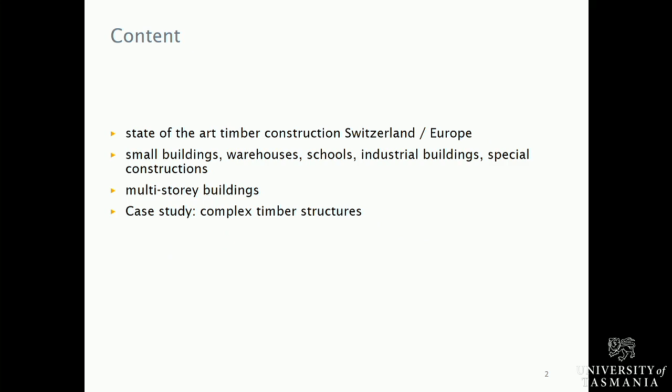Okay, let's get started. These are the topics I'm going to talk about to give you a little insight on what we're doing over in Switzerland, starting with small buildings, going through a couple of designs, and then discuss in the second part a case study on complex timber structures. For us in Switzerland or in Central Europe in general, timber engineering is a kid's play. It's easy for us. We do a lot in timber and we have a lot of expertise. So here, just to start with, a little example of a playground for kids built in timber.

Let's have a look at some small buildings, as these ones here. This is a building from Switzerland. The idea is to have an autark building, which just includes everything. And the idea is also that you can place these kind of buildings at any location you like, so you can move them around. You can move them by helicopter, for instance. And the idea is that everything is in there you need for living, like the resources. You need electricity, you need water, you have waste. So you try to get around with all these border conditions, and this gives very small, compact, but also from an architectonic point of view, very nice structures.

This is an example from an architect from Madrid. Same idea, as you can see, very lean construction, very simple kind of architecture. Everything is in there. You can see the two hooks which are used to transport the building to a different site. Of course, all the footings are temporary. You can have something like screwed footings or temporary small concrete blocks. That's all quite easy to do.

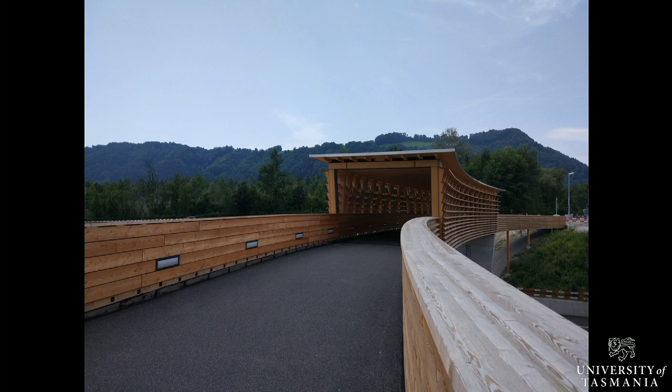Another example, we do quite a lot of bridges, be that for normal traffic, or especially for foot traffic, bicycle tracks and stuff like that. Here, a crossing over a 4-lane highway, very simple solution. Basically, what we have here are two walk-in trusses, nicely covered bridge, very good for protection against moisture, direct water. I think this is the way you have to build. Also, there are some barriers around here, which are nicely protected. So these layers, you can replace them if you need.

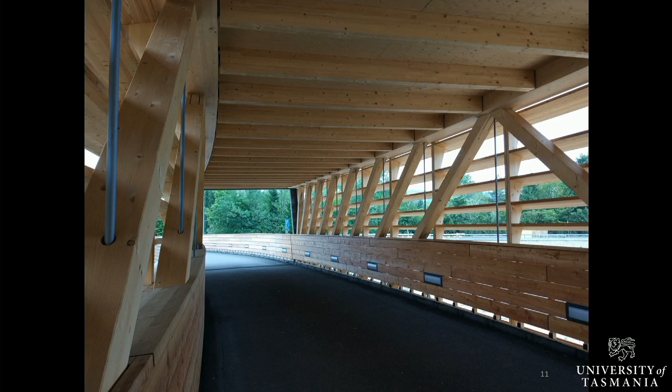Inside view of such a construction. You can see the trusses, very simple. It could be all in timber, but in that case, to make it a little bit more slender, they use here some steel rods for the hangers instead of using quite big cross sections in tension. So very simple structure. On top, you have this battery of glue laminated timber to support the roof. On the bottom, you would have the same system being attached to the bottom girder of that truss.

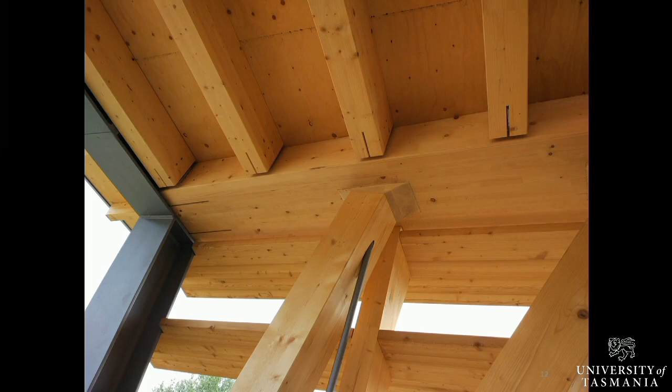So, pretty straightforward solution. I think one of the things which is very important in timber engineering are, of course, the connections. And you can see here some typical connections, which you would find in many structures. You have some connections where you go onto contact. The connection between the secondary beam and the top girder of the truss would be just a very simple bracket connection. This is a bracket which you won't find off the shelf, so it has been designed on purpose for that. And what we use then is some small diameter dowels in double shear to make these connections.

We also try to use the materials where they are appropriate. So, for instance, the portal on the front, to take all the horizontal reactions from the bracing on top and on bottom, is realized here in steel, because you get smaller cross sections. You have heaps and heaps of resistance out of these cross sections. So there's no point to use at these locations, for instance, a solution in timber. And it makes, of course, the appearance of the whole truss very slender.

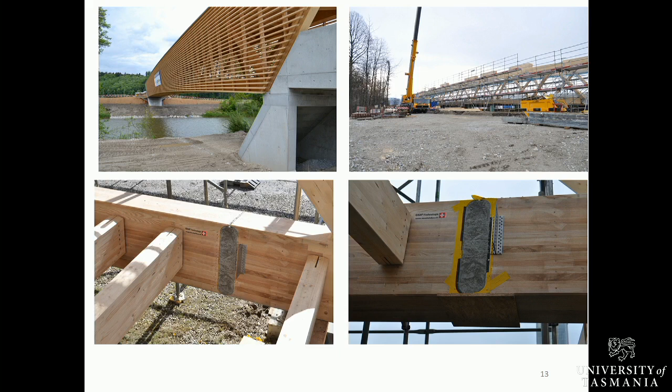This patch here is basically finishing the connection. You could imagine that in here we have some glued-in steel rods and steel plates, a steel connector, which allows to connect the two pieces together, and then you either grout or with a resin you protect the entire connection by this simple means. So I think these are quite efficient, very nice structures.

This is quite a new building that has been built on top of the Prealps in the center of Switzerland at an altitude of something like 2,300 meters above sea level. All the structure has been brought in by a cable car, which is actually servicing this top location. This building has been designed by Herzog & de Meuron. The architects amongst you certainly know these guys. They're looking at perfect solutions. Everything is designed through from A to Z.

If you look, for instance, at the line of these rafters here, if you stand in front of it, there's just a line. It's not plus or minus half a centimeter or a couple of centimeters. It's really precise and very neat. So the big challenge here was actually to prefabricate this structure in a way that it could be brought up by cable car and put on site.

Of course, on site there was a crane in the end, but the big challenge was basically all this planning, prefabrication, transport, and all the logistics you would need for building in such a place at such an altitude. On top of that, of course, winters are quite long, probably a bit longer than in Tasmania, where they go from November to October or something like that, with just one month of decent weather, but a similar case in Switzerland. So a pretty long winter and short construction period.

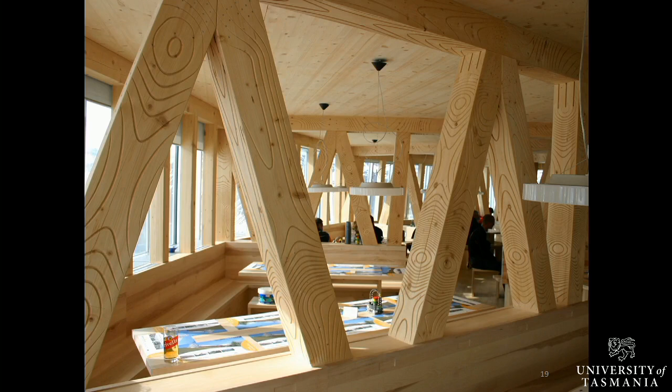And here again, of course, construction period even shorter. We are looking here at an altitude of something like 3,600 meters. So it's quite difficult to build in this kind of conditions. Inside views, it's a kind of a rotating structure. You can see some trusses which form separations, and also some new tools being used to decorate. So it's some CNC working of the timber structures just to make it more look like timber.

But basically this is also one of the concepts which are very important for all the structures I'm showing you. See they're all very neat, very clean, hidden connectors, and of course all the structures you will see are very precise, and this is one of the key issues we are looking at in Europe to get this level of precision realized also for timber structures. This then allows, of course, in a very short time to set the structure in place.

This is another good example, a little viewing tower, something like 35 meters high. This was a project we developed at our school. So it was a student semester project where the students collaborated between architects and engineers. So there was one architect, two engineers developing a project, and we did some pre-designs of this project. In the end, it was realized by the same student who had this idea as he was working in one of the bigger glulam factories in Switzerland.

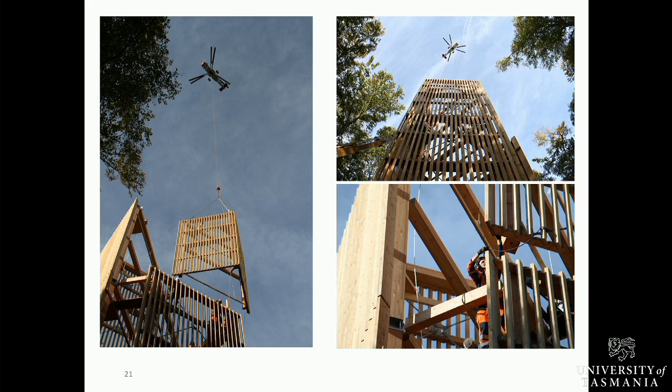So the whole operation to build the tower you have seen before took something like 8 hours of helicopter work, putting together the entire structure. The advantage, of course, of such things is that you don't need scaffolding. We need scaffoldings for towers. There are other examples that have been realized in Switzerland. Well, these scaffoldings, if you're looking at 35-meter high towers, they cost 60,000, 80,000 Swiss francs, and this would be quite a substantial amount. Of course, flying helicopters is also quite expensive. The minute is very, very expensive, but in that case, it turned out to be much faster and cheaper to do rather than going on site with cranes and trucks.

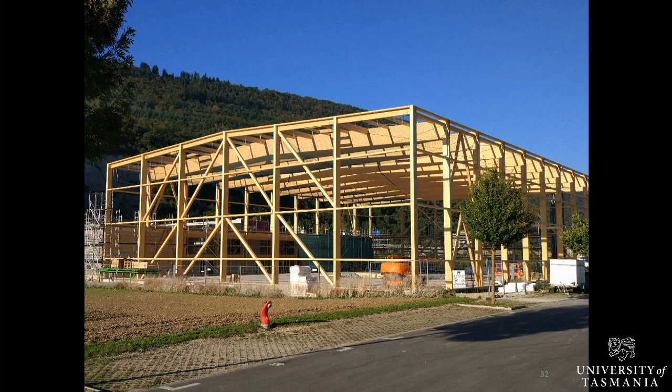Let's have a look and start looking at some industry buildings. I think some of the important things you need is you need some decent material to build with. And one of the decent materials, of course, is glulam, very important structural product we use very, very often. You have seen many projects already before, these nice square cross sections. You only get them if you use glulam.

If you use sawn timber, you will have the cracks due to seasoning. If you want to have nice and constant aspects of the timber, glulam is certainly one of the favorites to be selected by the people doing these constructions. Here, this is a building with a span of maybe 23, 24 meters. This was for the WTA Women's Tour in tennis.

This building is actually just sitting next to our school, which is part of the same school or University of Applied Sciences, so it's next to architecture, timber, and civil engineering. There's also a sports school which forms people like Roger Federer, and they are pretty successful, as you know.

So this fellow is here. It must be something like standard. So in length, we can produce lengths up to 32 meters, height up to 2 meters, tapered, curved, whatever you like. And I think this is a prerequisite to be able to realize structures in a cheap and efficient way. Mainly these guys here are a bit special.

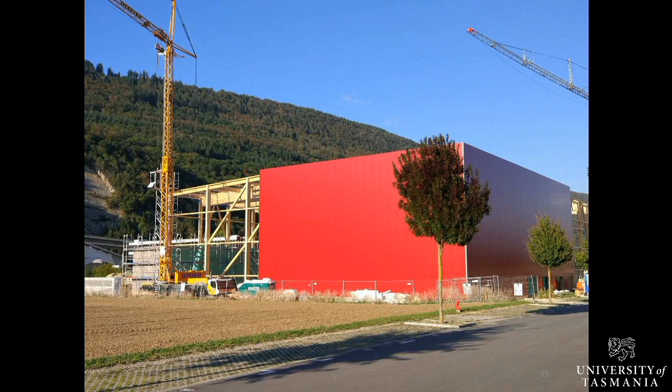It looks like any other boring building, red facade, in this case in steel, because it's just the cheapest and most efficient way to get it done. You could, of course, do it also in timber. It will be more elaborate. There will be more maintenance. These kinds of products, of course, are quite interesting to be used for simple solutions.

Let's have a look in a little bit more detail, not just showing heaps and heaps of pictures. This is a very new building, which is very special because it's a carpentry setup for a medium-sized carpenter who is prefabricating homes. The special thing is that this factory is going to sit in the middle of a residential area with very restricted access to bring in the materials and to bring out the prefabricated homes.

The second interesting thing is that these guys wanted to have one and the same building for producing these homes. On top of it, they planned the office of that company, and on the next level apartments to be rented out. And of course, this gives quite a lot of thinking to be done in terms of living and working in the same place. So you have to care about acoustics, vibrations, noise, and so on. And so this was the big challenge in these buildings.

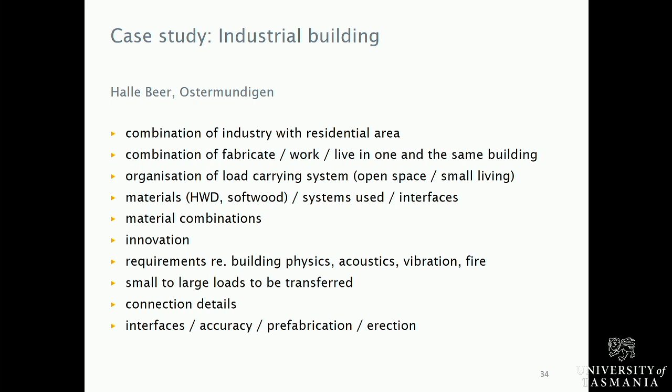So in this construction as well, some of our students participated in developing the layout of the factory, looking at truss systems for spans, again, of something like 24 meters, and in particular looking at hybrid structures, combining steel and this beech hardwood into high-strength columns, with the goal that they would have a similar size as a concrete column. If you look at these systems, you can take a lot of load on them.

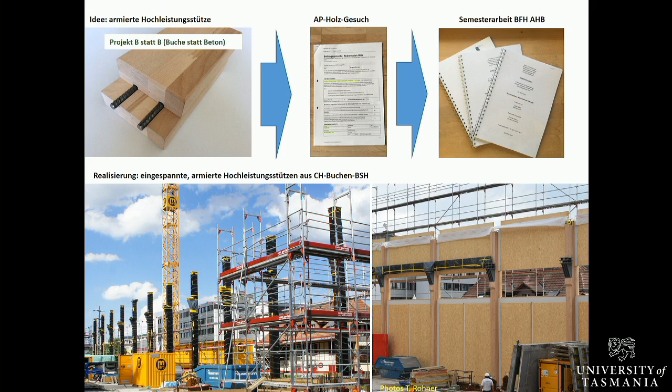So this asked for some tests and development and calculations and optimization, and the guy was interested to use that in his factory. So you can see here this column prefabricated, nicely covered. Beech is known to suck in water as much as possible, so you have to protect these fellows from the rain when you're building. So here again the columns.

And another thing which is very important and gets more and more important is to be precise. Usually the concrete guys are plus minus 3-5 centimeters, which is not precise enough. So we had to take all these tolerances by other means.

So for instance, looking at positioning this steel box here, which will then take the footing of the column, the column has to be vertical and at the precise position. It must be spot on, plus minus nothing, because afterwards you will put in prefabricated wall systems and you have to level out your building nicely.

So here, for instance, they also used this new technique called BIM, which is nearly a 4-letter word in Switzerland already, because everybody talks about BIM but nobody's doing it. Here they really tried to interact and have this data, so leveling out this piece was directly controlled by the programs via this measurement device here.

So you can see here a closer shot of these columns. Basically, the column finally will be a triple member with grooves to the side of the member so that you can place your rebar. This rebar will, of course, in the end be linked with adhesives to the timber to have a composite action, and at the bottom of the support to have a fixed moment connection.

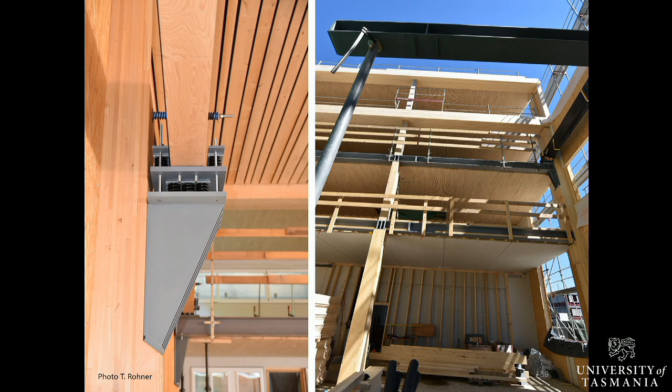So you can see here the columns again. Piling up the columns, it's important that you have end grain connections. In this case here, even replacing a direct contact between timber with an additional steel box where you can connect the secondary members here, also in steel, to facilitate the erection.

So these floor elements would slide into these I-beams, and you can have very easy solutions for the floor. You can nicely connect it also to these I-beams to have diaphragm action and stuff like that.

Well, I think this is the most important thing you can see here. Even the crane, the overhead crane they have in there, something like a 10-ton crane, is running on a timber beam. You will get a lot of vibrations and dynamic action on the building, which you don't want to feel when you're sleeping on the last floor.

So a lot of effort has been undertaken to actually disconnect this system from the rest of the building. A nice little detail introducing by contact these quite big forces coming from the overhead gantry.

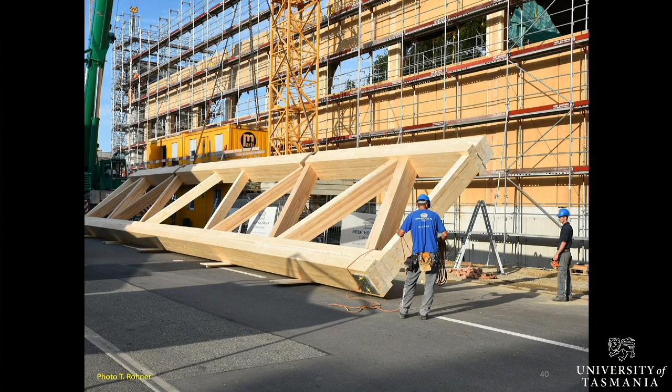This fellow here was also part of the development. You would like to have on the bottom, on the first floor, an open space for all your activities for building prefabricated homes. So you need this open space, and you need big spans.

And there have been some calculations, as there are a couple of stories on top with substantial weight. So they developed these big trusses, which are, again like in that timber bridge, walk-through trusses as part of the building. This element here has the height of the next story.

Here again, in some parts they used hardwoods for the highly loaded diagonals. You can see no connectors in there, but of course everything is connected, in this case with glued-in rods, which from an aesthetic point of view are very interesting. Well, we have some people who know how to do that.

You have to do that, of course, off-site in the factory where you have good conditions. All the support details in order to stack that element onto the timber columns or the beams are already in place. You lift it up, you position it, and this will be the final view from the interior.

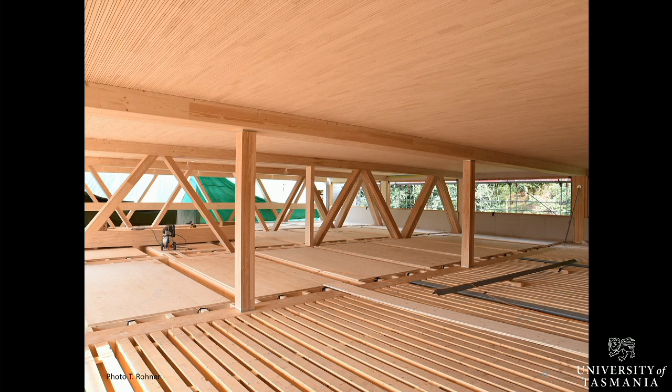There you have the trusses giving the height. You have the top chord of the truss and the bottom chord where you attach the secondary elements. Everything is prefabricated as widely as possible to have it easily installed. Not many things to do on site.

So basically, of course, there are some tools around, but not many. It's all done or prefabricated to a level that there is nothing left to be done on site actually.

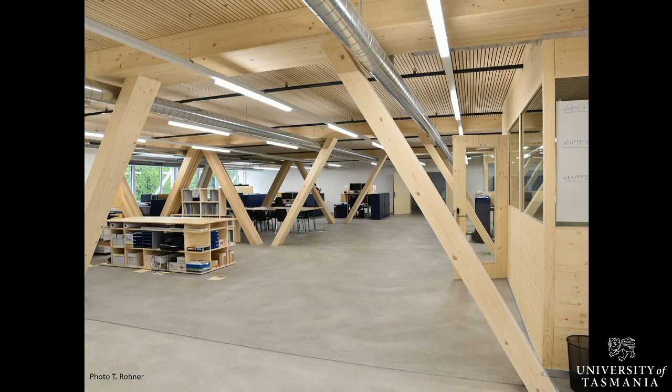And this would be the final view. You can see here these trusses. So these trusses are not full trusses. It would be preferable, of course, to have the truss linking at the node. So we get some bending moments here. So that's why probably also these fellows are quite big. But we need some space to go through.

So this is the office part of that building, where actually the structure matches quite well with the usage of that office space. Of course, it stands maybe a little bit in the way. It's not an open space, but in an office you don't need that necessarily.

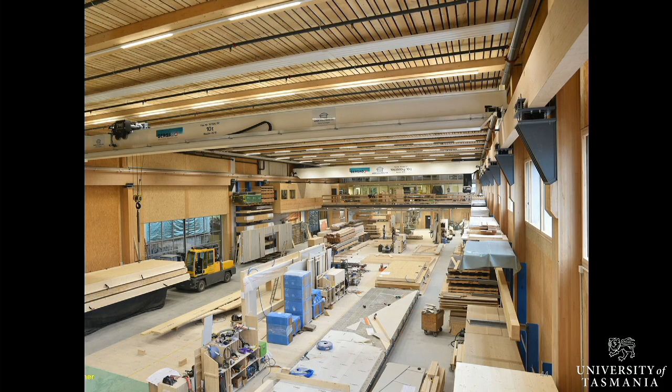However, on the bottom, this is then the look into the factory, which is operating now. We will have here again the bottom truss at the bottom chord of that truss, which is sitting above, ensuring this big span. And you can see the nice layout with all the materials, all the machinery which you need actually to prefabricate homes. So they will, of course, build finished elements which they then transport to the site for a new construction.

This is just another shot. You might also see that these workspaces usually are quite nice and clean. The messier places, you could maybe find in glulam production because they are working with adhesives and stuff like that. But in these places here, you want to have precise solutions. You have a neat way to work with the materials.

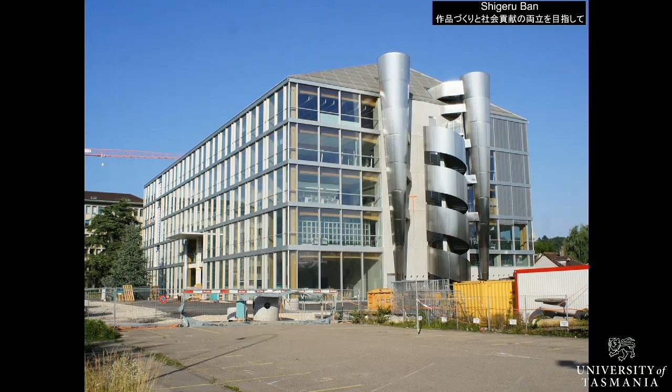Okay, multi-story building is something which is very current. People are trying to do them here as well. So in Switzerland, this is also a big issue. Everyone is trying to break the record of the highest building, most possible stories. But I think the big market is in something like 4, 5, 6-story buildings. And at least in Switzerland, we are not allowed to build that much into the height. It is changing now, but in Biel, for instance, where our school is sitting, we are limited at something like 5 to 6 stories.

This is a Shigeru Ban design, which is part of a big development by the Swatch Group. You know all Swatch watches, and Hayek, who is the owner of the Swatch Group, wanted to have a timber building. And here again, we are looking at the building where they assemble watches. And that means that in these workspaces you must have zero vibration.

And this is a very big challenge because every construction material is kind of softish. You have your floor systems, so even badly executed concrete floors or steel floors, they could be too soft. And that was a very big challenge here to be solved, because in these areas you have just office or workplace after workplace where they assemble the watches.

Unfortunately, they put down the blinds, so you cannot see the timber structure mainly, but it's a very simple post and beam timber structure at the inside with a kind of a curtain facade in glass all around.

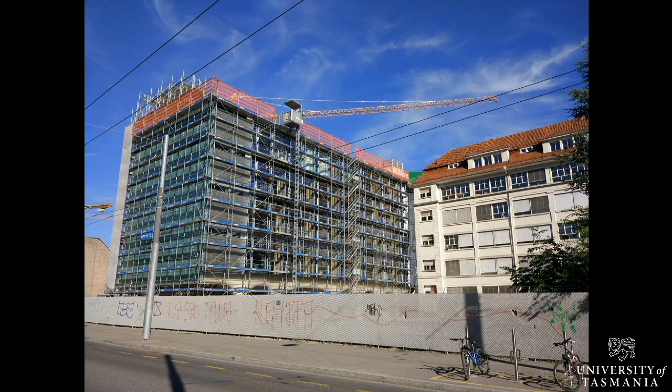This is the head office of the Swatch Group going on. Again, a 5, 6-story building. It's all in timber. And you will see afterwards the structure which goes above, on top of that, will be a very interesting free shape structure, also developed by Shigeru Ban. And this structure is going to be completed in the very near future. You will see some slides afterwards.

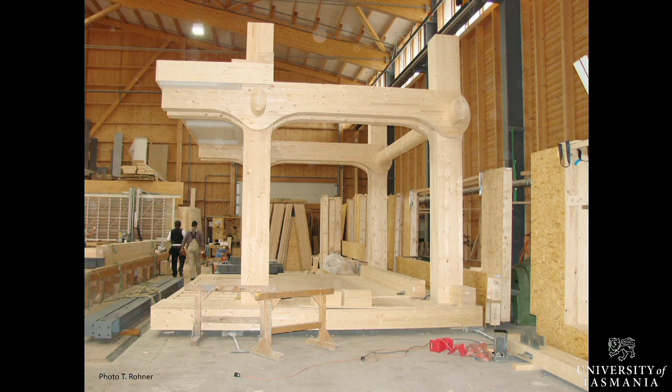Well, apparently Shigeru Ban is very well known in Switzerland, and people like to work with him. This is another Shigeru Ban building. It's just by chance. This is the Tamedia building. So a company that does prints, for newspapers, journals and stuff like that. And Shigeru Ban actually developed a system for that building which works with solutions that are only made in timber. So there are no steel connectors in here.

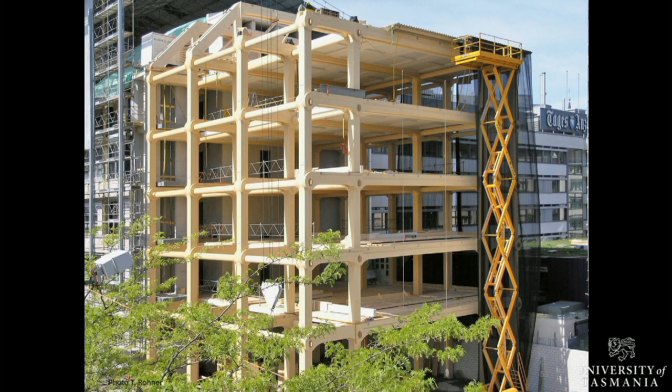Looking at a hinged connection, for instance, you could have this hinge in steel and a lot of steel plates all around, and the solution they were looking at here was to have a timber connection with this kind of oval or elliptical connector. So that's not a hinge anymore. It gives you some moment restraint. That means that you have frames which are built, which is very good for static purposes. Very simple erection, and that would be the building as it is realized in the end. It's like with bones.

Basically, the main part, in order to take all the bending moments or whatever, can be quite slim, but where you have the connection, there is some effort to be taken. You might need larger cross sections, especially when you're looking at pure timber to timber connections.

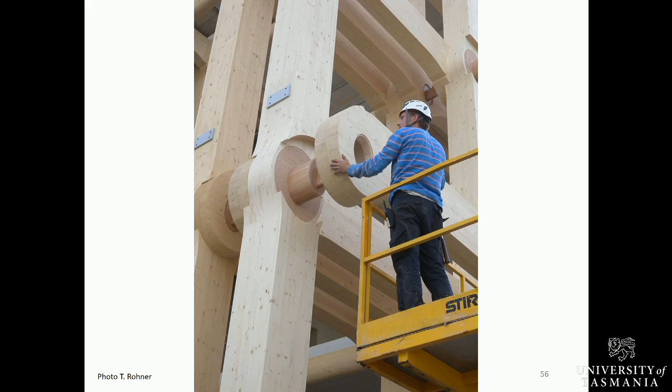Very interesting stuff. Here again, everything is prefabricated, 100% precise, and it can be erected by a crane and cherry picker, not much to do. You just see a little view of that connection, because there's so much force going through that you cannot work anymore with our spruce solutions.

So here is a multiplex plywood with plies turned 30 degrees, one next to the other, which gives a very uniform, homogeneous block of timber that can take the high lateral pressure you get when connecting the forces to that member. So locally you can see the timber has been reinforced at this location.

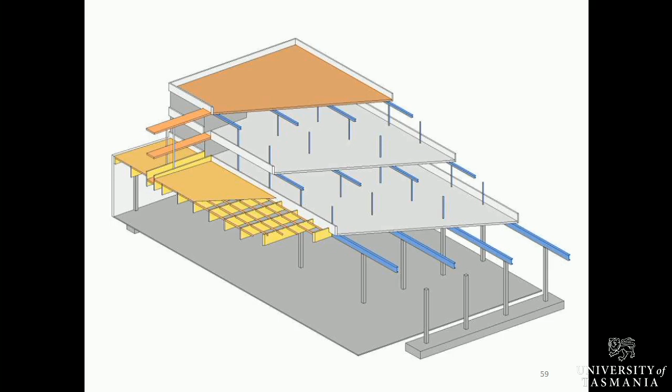This is another trend we have in Europe, looking into hybrid structures. Not everything has to be in timber. For some projects, it could be interesting to place the material at the perfect location. So here they used steel columns, and at places with bigger spans, precast concrete columns. Steel I-beams connect to concrete for composite action between steel and concrete, and in the other direction, timber, which gives you composite concrete-timber floors.

So this would be a shot through the section of the floor. We have these I-beams with the stud connection in order to have the concrete-steel connection at this location. Then they used prefabricated, vertically laminated floor panels with a little offset in the board. They actually worked with two boards of different depth, partly for the looks when you look underneath, but also for acoustics.

This gives a very good surface in terms of acoustics. You don't need any further insulation or panels, as you can see here. Here you see the grooves and the rebar, which make the composite action between these vertically laminated panels and the concrete. Very easy system, very simple, but of course quite special.

It's a new development to have systems that span in two directions. So far you would mainly span in one direction because getting away with negative moments on the supports isn't easy. You have to make sure the compression goes through here, but by casting it into the concrete at this place, it works.

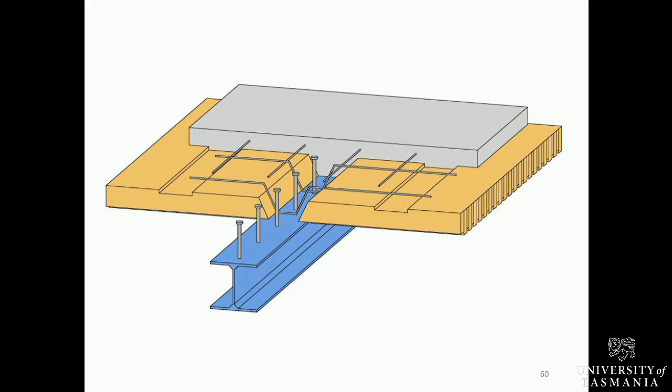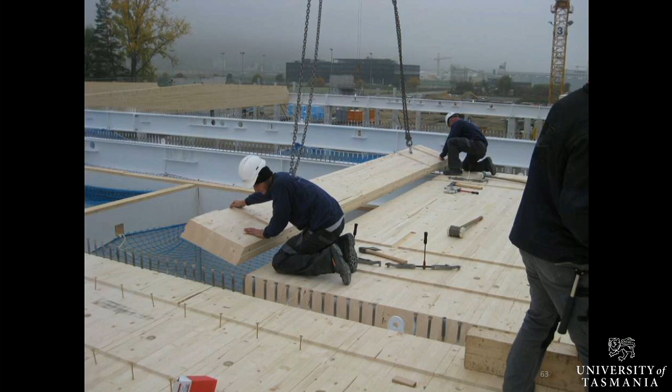Just some shots of how this is realized with the bolts connecting to the steel. Very simple installation of prefabricated, roughly 1 meter wide panels - that's easy to do. You can see the grooves here again for the composite action, with some screws in there just to make sure there's no uplift between the concrete layer and the timber layer.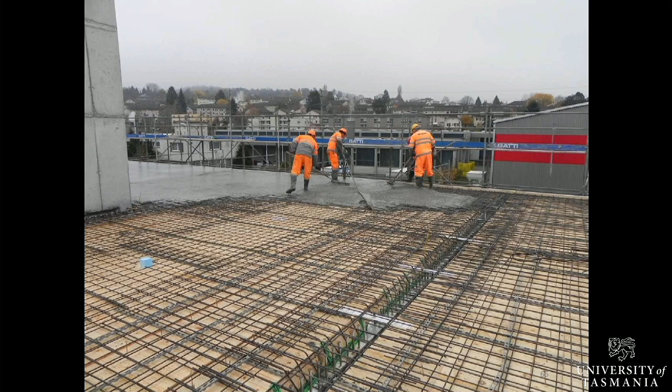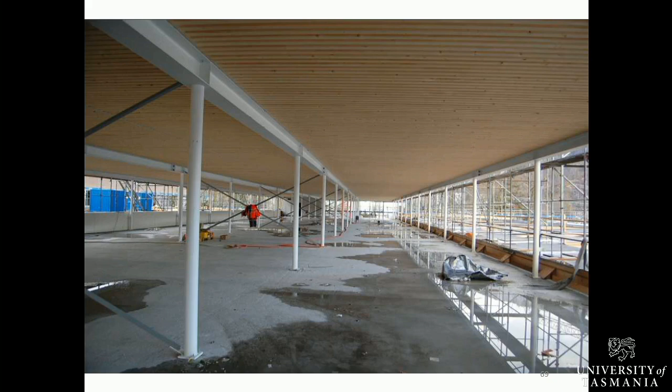Then comes the rebar, you pour the concrete, and you have a very interesting high strength and high stiffness composite floor. The spans are quite big in this case. Then you go for the next story. And from underneath, this is how the offices look like in the end - here a shot from underneath.

You can see this plus-minus profile, as we call it, which is very good for the looks and very good for the acoustics. It's quite interesting also: if you have this vertically laminated timber, you might have some concrete grout running through, but if you water, for instance, the top surface, it will swell a little bit and close up the gaps. You don't need any plastic sheet, you can directly pour the concrete on it, and you don't have any concrete liquid dribbling through your system. If there is, you have to clean it. We don't want to have dirty members in there.

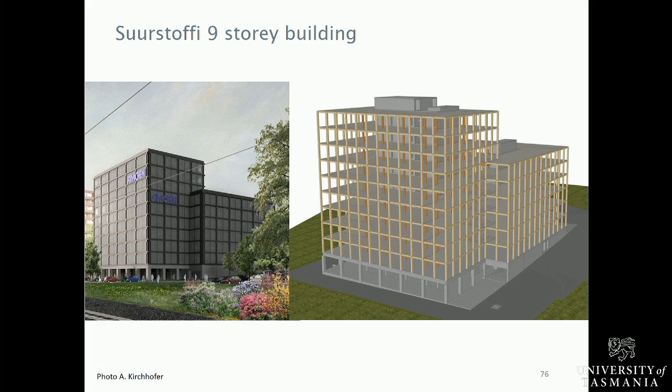And so on. I think we don't have to discuss that too much, but in Switzerland now they're also looking at 8 to 9 story buildings. We have quite easy laws in terms of fire safety, going up to the high rise, which is around 24 meters, which allows you to build 6 to 8 stories without any big troubles. Of course, there's always a concept you have to establish in terms of escape routes, non-combustible materials, and some places you might need a sprinkler. These things the architects or the engineers discuss with the fire authority.

And then it's the same again. Here you can see this is working quite well. High strength columns for the vertical load transmission, and for horizontal load transmission, composite timber-concrete floors. We have in Europe a new material that has appeared lately, which is beech LVL, a hardwood LVL with extremely good strength properties. They make big panels, but from these panels you can cut beams and columns in the size and width you would like. Sometimes you might have to patch them up sidewise in order to have your final section.

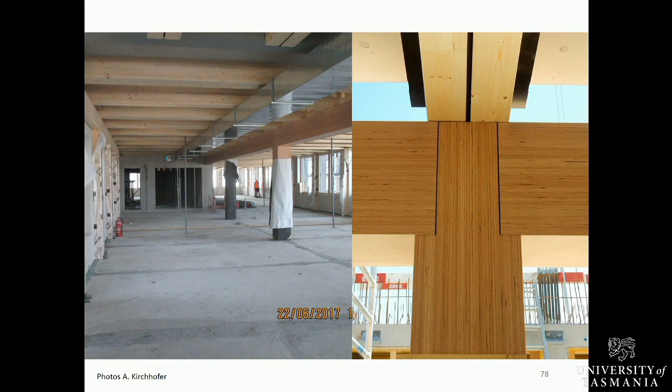Okay, that was my first part. Do you have questions on this before, after the break, we go on with some complex timber structures? Yes? Base plates. Do you say that the base plates on the foundation are welded? Yes, usually. Earlier you would say don't weld on site because you never know what you get. But now for some of these connections, it is much easier to weld. With mechanical connectors, you need double plates and splices and whatever gear to make it fit. But this way, it was just easy putting down the column. Exactly. It must be level, because you can maybe patch up a little bit, but not much. Maybe 2 millimeters if the column is not 100% perpendicular.

But there's always the big discussion: do you also want to have recesses in the concrete? For instance, you have a concrete core and you have to attach the secondary system one way or the other. You can provide openings to fit in, or you can provide already cast-in steel members with very complicated connection details, which is then again not very handy for the concrete formwork, right? Because it's in your way. So people start having flush surfaces with all the insets required already in there, and then come level and do some minor welding on site. But of course, you have to be careful and do a good job.

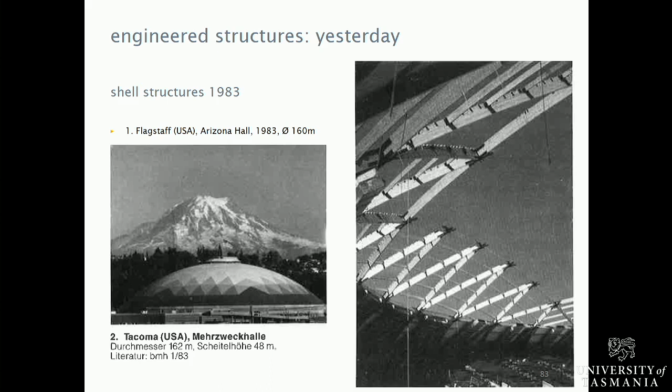Okay, let's go on. Complex timber structures. The things that I've shown you before is kind of boring stuff. Everyone does it, and of course it needs a lot of know-how and technology and so on. But I'd like to present you some very new fields where a lot of research is being done now. This is what we had already a long time ago. So if you look at the date, 1983, they already built domes with 160 meters diameter in free cantilever method. That could be done.

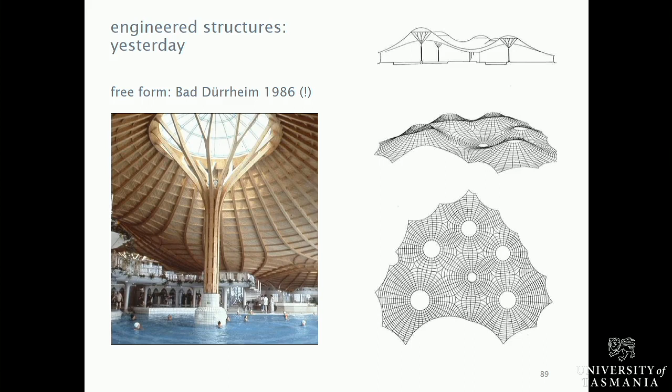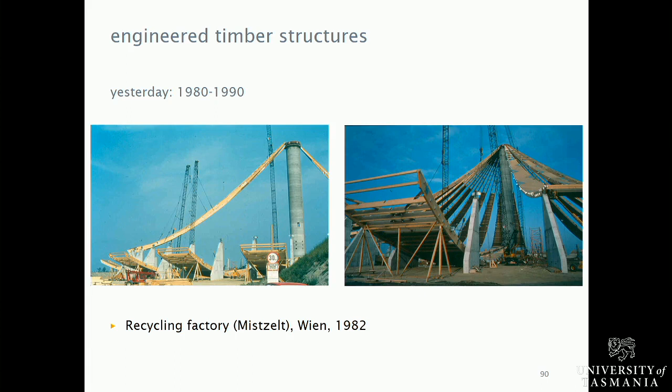The interesting thing is that these structures were actually built with the first issues of design programs. Before that, everything was done by hand, and at that time ETH Zurich, for instance, started developing computer tools which would allow to do static calculation. And I did my thesis at ETH, looking at whether it was possible to design dome structures by hand or not. And the conclusion was it's all fine as long as you have vertical loads, but as soon as you have non-symmetric loading, you're just stuffed with hand calculation. So we need these tools, and it was quite amazing actually that they could do this at that time already.

And the key basically for doing that is that there's a very high constructive competence within the carpenters. We train them for 4 years, and it's a good training. The know-how of the engineer, of course, is very important, and everything was done just using very simple models in order to get this geometry and these shell structures. And actually, I remember that for this hanging structure, they checked the deformation, and the deformation was within 20-30% of what they actually expected. It was even a bit stiffer than they thought.

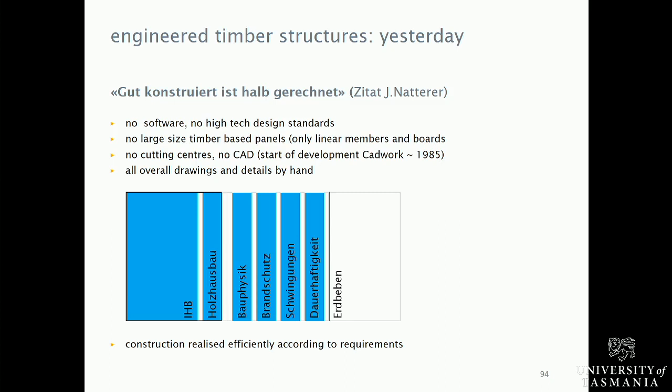Very interesting. And so people would only focus on some items. For instance, in that case, they would focus on how the engineered timber structure can be built. That was the main focus. And maybe there were some requirements in terms of something like fire safety; building physics, not important; vibration, not important. People wouldn't look at that, okay? Just take the most important issues and try to find a solution. That was the approach then. And so basically what they used were either short, simple elements or complex connections in order to play around with the geometry, but everything was basically quite simple.

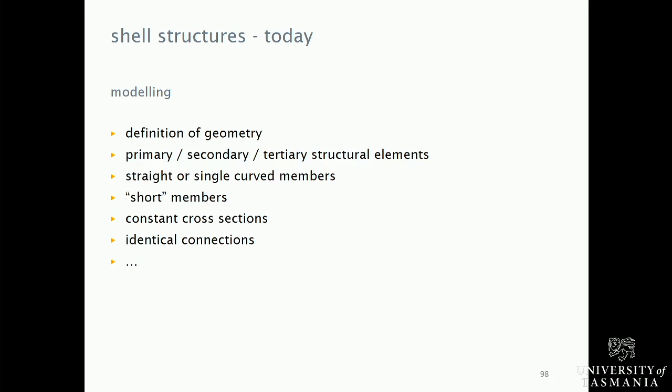And still today, this is what we do. What we have, of course, in Europe, we have state-of-the-art design tools. We have standards. We have Swiss standards, which are very similar to the Australian standard, which is also similar to Eurocode. And in these standards, we have a lot of information, a lot of help to do a correct design. And what we have today is a very big range of solid timber, glulam, engineered wood products in terms of panels, which can have big width and extremely big length. So it's getting much easier to actually build structures, or also complex structures.

There are also a lot of people developing systems like Lignatur. They would have panel members, but which are built up by single boxes. So with all the solutions: how you can connect them sidewise, lengthwise, how you do the detailing and everything.

So there's a lot of knowledge around. And of course, the big companies, they also have CAD/CAM. They can digitalize their structures. So we're getting in an entirely new kind of world.

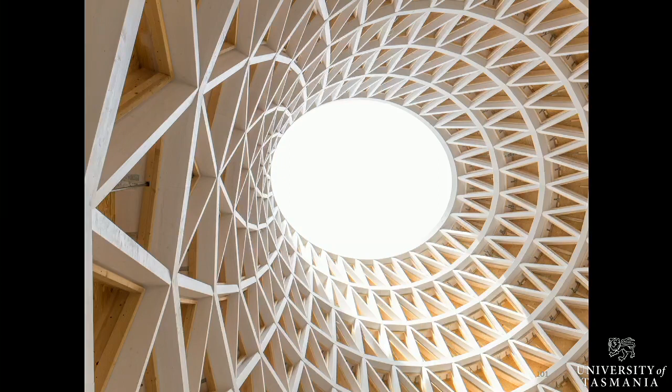So this is, I remember, a church building. This is very simple, basically, because if you look close, all the members are straight, or maybe they are slightly curved in only one direction. And the key here is that you have a solution for the detail that works so that you can build that structure, but it's not very, very complex.

It's still a demanding task if you want to model this and to check and to get all the internal forces and so on. But it can be realized even by companies which are fairly small. Sticks and putting the sticks together.

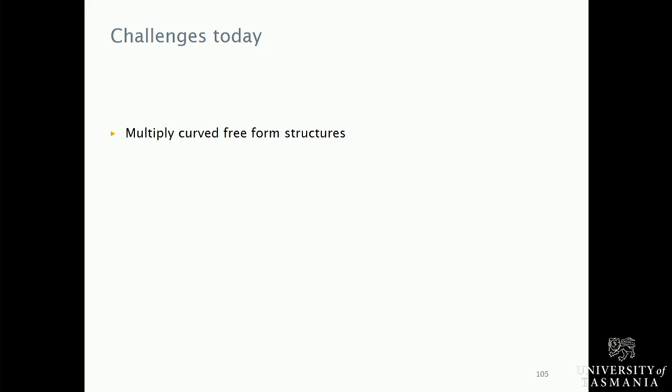Now the challenge we're looking at is multiply curved, free-shaped structures. You might have seen one or the other. Again, Shigeru Ban, sorry, maybe you should come up with good Australian architecture, and then we'll have some Aussie designers behind. A straw hat, which gives this kind of shape to the Centre Pompidou in Metz. So this is a real free shape structure,

actually covered with textiles. So even covering with textiles is not that easy. You need a pattern, like for clothes for a lady, for instance. You cannot have curves covered with square panels. That doesn't exist. So already this is a huge challenge.

In terms of timber construction, this is not too difficult to do once you have the geometry, because all that structure is built up by layers. So we have basically always two members running in one direction. So we have three directions, and in this case the roof is built by piling up horizontal lying members. The trick is basically to get the connection, and the connection was very complex

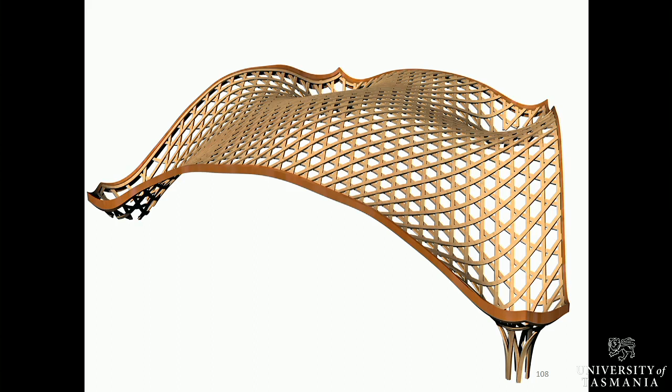because you have to start from the bottom. You sit on a scaffolding, you put the first layer, and you have a connection sticking out. You put the second layer, then you have to extend the connection, put the next layer, and so on, to be able to erect such a thing.

And if you're looking at the single members, of course, we have fellows like that, which not many people can do. There's one company, Hess in Germany. They started doing this kind of double bent members working with small squares, because a board which is, say, 35 mil thick, 120 mil wide, you can bend it only flatwise. You cannot bend it sidewise.

And in order to get the bending on the other side, you also have to work with 35 mil, okay? I have no idea how they put the things together, because you have to put pressure on both sides. You have to put the adhesive on and everything. So this is the secret of the company.

What people do usually for that is to have a kind of a pre-shape where they first produce a beam that is bent in one direction, then they cut it up in the other one and reglue it and put the curvature in the second direction. And if the geometry doesn't fit 100%, they start milling it down to the final dimension. So this is the way they do it.

Again, sorry, Shigeru Ban. This is that building. We have seen that building on the back. This is a 5-story timber building, the headquarters of Swatch. And there is this reptile or this snake biting into that building, which is a 100% free-form structure.

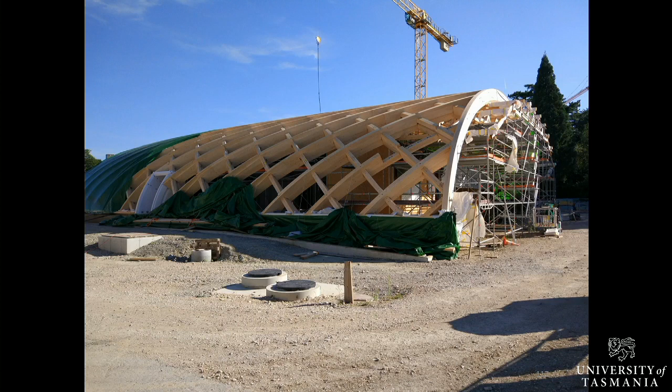Looking a bit closer, in the end, it's all very secret. Nobody has seen that structure from the inside or was allowed on site. They make a big secret out of that. But this is the kind of members we have.

If you look at these beams, they're all composed vertically of 2 sections because we have in this situation lap joints. That means you cut out on the bottom member half of the timber, and on the top member the other half of the timber, so that they can insert and get the connection. So for instance here you see there's one piece missing which comes on top.

So you put first this one here and then the other one comes on top, and you have to make sure that you can slide it into these gaps there, and also you need some connectors in order to take the shear forces. And I don't remember how many members. I think there were something like 2,800 members. Not one member is equal to the other one.

They're all different, and every member has to be designed specially. This is a huge task, of course, and I know that the guys who produced this structure, which is Blumer Lehmann, they managed to do something like 80 pieces per week. That's all. And every piece, before you manufacture it, you have to check if the geometry, curvature, everything is right. Very big task, because on site, if it doesn't fit, it doesn't fit, and you have to go back to

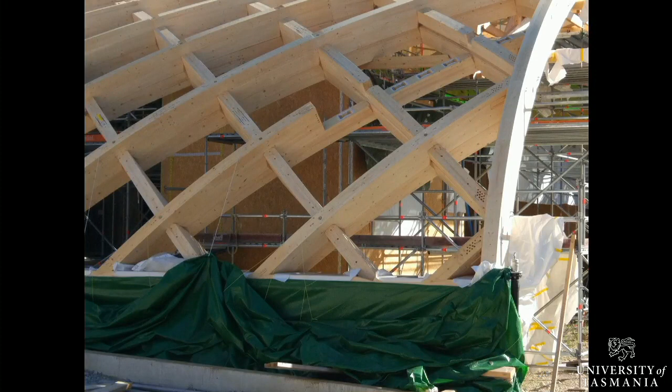the workshop. The only thing they did sometimes was some sanding, because it would not nicely fit in. So putting away a 1/10 of a millimeter or something on the surface, and then you can slide it in and do the connections. So it's very, very complex work. So closer look here, and you can see how these members intersect. You have to think about what part of the member is continuous, where do we have the cuttings.

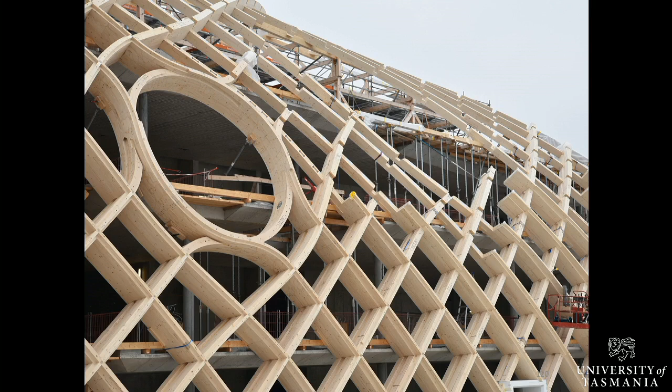What they try to do is basically to have not more than maximum 3 points to connect one piece on top of the other, because then the degrees of freedom are reducing very, very much, and you might not be able to erect it. And this is the kind of structure they built. So you can see this member here, for instance, there's a joint here, and this member goes over to somewhere here. So this is one part of the structure, and everything has to be produced prefabricated.

There was a question before at what moisture content these things are produced. They're produced at 12% plus minus 2.5, difference of 5% maximum. Everything is produced today in the shop. It's delivered at the end of the week. Let's say these 85 pieces, they are delivered, and they're straight away put into the structure.

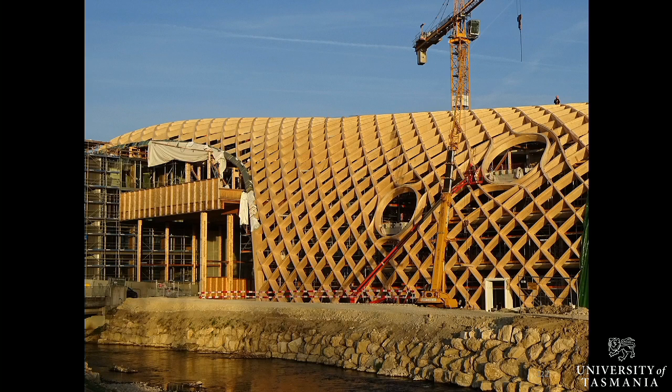And as you have seen before, the structure is always covered. So you avoid having moisture content. If moisture starts getting into that, you can forget about assembling that stuff. It must be really, really dry, otherwise it doesn't work. And then this is the structure, how it looks like in the end. Unfortunately, they don't put a nice translucent cover on that. The idea is that it looks like a crocodile or a snake formed by scales.

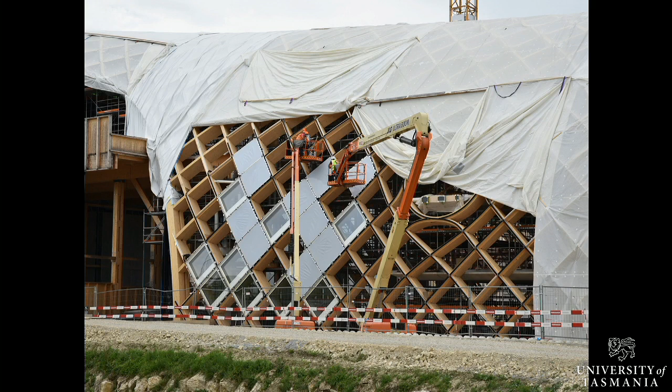The information from the guy who was looking after the production was also that every surface of a scale is about 2.5 by 2.5 meters. So they try to optimize the size of these openings. And the various covers, some is textile, some is solid, some is window, which gives then the final aspect of that structure, which will be opened pretty soon.

Now this structure here looks high-tech, extremely high-tech, not necessarily super high-quality timber, but a big problem is that you're cutting the fibers, and you have to do some precise design, and you might need some really good quality timber, and very, very complex. And the problem is, you will see in the end, that in most cases you don't get this shape in direct gluing, so you have to do a lot of milling. So what you do is basically you produce a big block and you start milling, and you have a lot

of waste. So there were some guys at ETH Zurich, Gramazio Kohler, architects, who were looking at digital fabrication, which actually took a completely different approach. They only work with boards. So you can see here a truss. This truss has a certain geometry, but the geometry changes from one layer to the other. So maybe this diagonal at the next level is just twisted around a little bit, not having exactly the same

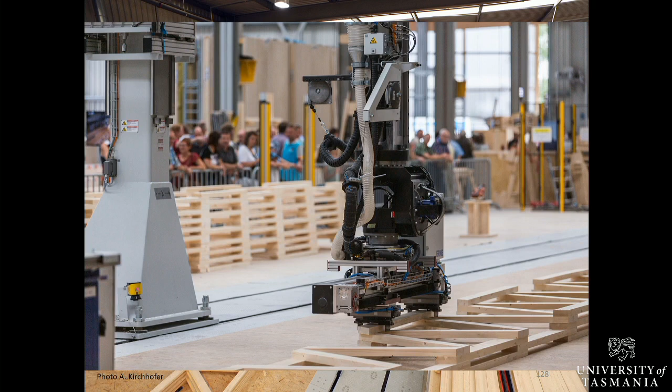The only guy you will see in that fabrication yard is the guy sitting here at the control center with a tie and suit. Nobody's putting one single hand on that entire structure. So here you can see that robot, and as you can see, the difference to the first structure is the first structure is defined by the connection, which is actually given by all the pieces which interconnect. So the connection point is defined by the cutouts, okay?

But here, we are going to put that a bit more to the left, a bit more to the right. It's skewed, so the robot is the only one who knows exactly where to put it. He also does the check if it's the right position, if the thickness is correct, and then it nails these connections automatically.

You can imagine also the routine to determine the nailing pattern, starting from that point and knowing that every nail is going through probably 2 or 3 sections, and you don't want to hit the nail on the section below. You have to consider that there are some spacings between the connectors, parallel to the grain, perpendicular to the grain. You have to fit it all in, or you can work with a minimum surface required per nail. So to write this kind of routine so that it works everywhere is probably a huge work already.

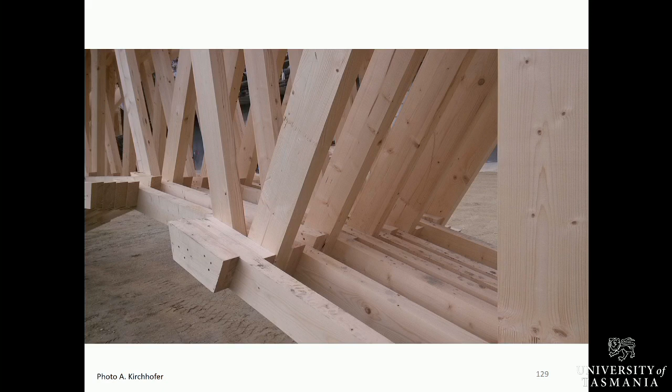And the interesting thing is, you see, this is just normal timber. So this is longitudinally finger jointed, solid timber in various sections, not a particularly good quality. But in the end, you have a huge family. You have a system with a system effect. If one of the fellows here is a little bit weak, it doesn't matter, the fellow next door probably takes the forces. This is then the concept of this type of structure.

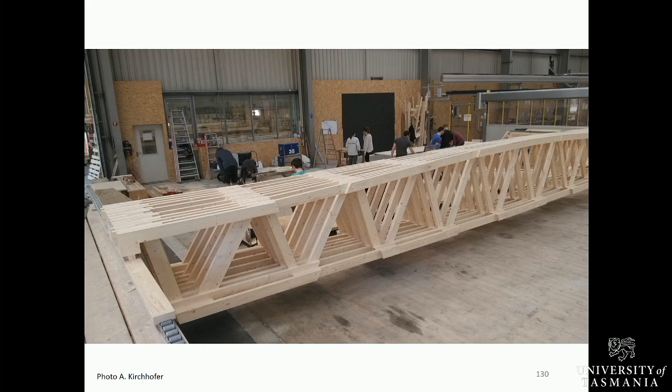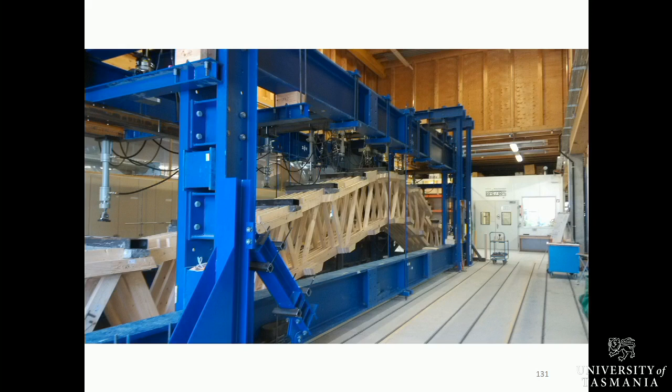So this is one prefabricated element. You can see that you get the curve in that way. You get also a movement in this way. So they produced heaps and heaps of these elements. We did some testing at our school to find out if the requirements in terms of strength and stiffness were met. The critical points here are actually the connections. So that was a special focus. So we would test 5 or 7 typical trusses, so different spans and different heights. That's what we were testing, just to make sure that it works.

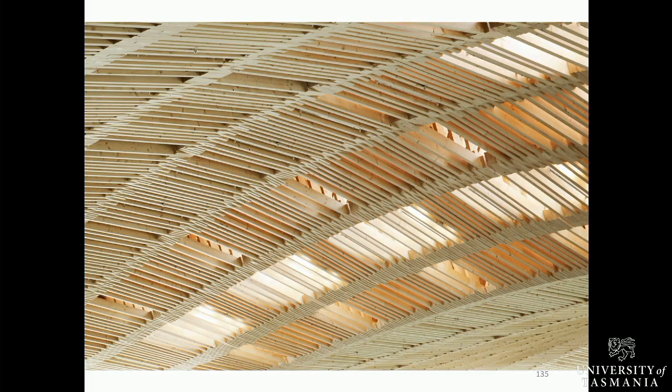And in the end, this is the structure you get. So all these elements are brought onto site, and they sit on a steel structure and give this wavy form on the inside. So the trusses you have seen are running in this direction. And of course, by playing with the number of boards and having openings more or less and stuff like that, you get this kind of view.

And I think this is a very interesting approach. The only thing is that no human could do that. It's impossible, because finding the position of where you put your board, in what angle, you need some tools to do that. And this is the final view of that lab. I think this is a very interesting approach.

So what we have been looking at for the moment in this approach is just stacking. Actually, they come from brick working. They wanted to have 3D brick walls where every brick is turned by 0.5 degrees compared to the previous one in order to have nice free shapes in brick walls. So they spent a lot of time, of course, to develop all this, and then they started stacking timber.

So this is the simplest way of stacking timber. Maybe Australia should start at this place for the moment, and maybe glue it together, and then you have a glue-laminated beam. You can also, of course, connect it mechanically, which is not a very good idea because you lose so much of the stiffness, so you need the adhesive. But let's say for special structures, you could do that, or you have longitudinal connection, or you have, let's say, laminar layered assembly.

You can also have the same thing curved, so this would be the Shigeru Ban solution, where you just have the layers and the boards go in whatever direction, and they're free in space. They're curved, but you can curve these fellows very easily. And the new approach is basically to go now into 3D. So that means that these positions or these connections here are not known in their location, and the robot is again used to build such structures.

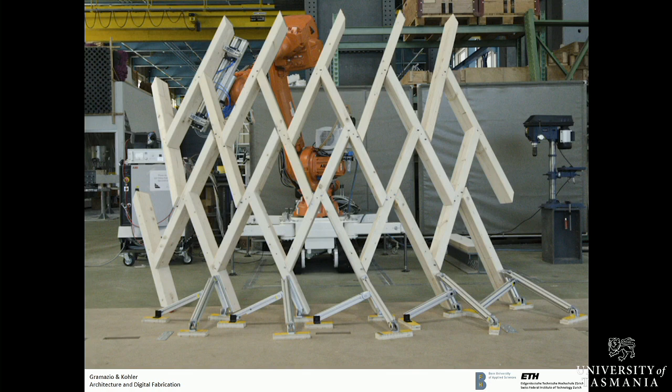Here you have full freedom, degrees of freedom, so the computer or the robot has to know in what angle, what position he has to put that. These were previous stages looking at tolerances. The tolerances can be managed, but if you start doing some cantilevering structures, this is like a Zollinger system where you have one continuous member, and then another, always a kind of displaced a little bit. You can already do very nice free shape structures.

Step by step, the routines were investigated, how to assemble the things and how to work with the system, and of course tolerances, because in the end you would like to have no tolerance or little tolerance.

Maybe just a word on this Shigeru snake building. Over 100 meters, they were out of tolerance, I think 5 millimeters, and across a 20 meter span, zero. Which is not astonishing, because if you had a tolerance, you couldn't put that thing together. That's the trick behind it — everything is so tight, it's 100% precise. But here, because you have so many degrees of freedom, the tolerance is quite critical.

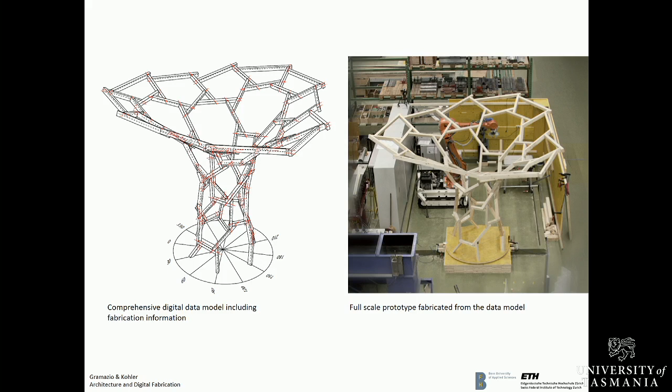So what you need is a digital data model which has all the information on the connection, on the length of the piece, on the cuttings and the ends. And from that, you can talk to the robot who assembles a 3D structure. Here you see all the operations at that stage.

We are already a bit further now. The robot grabs a piece of timber, it cuts it to length with the right angle. We also had routines trying to find out if the piece is more or less heavy, because you have tolerance in the arm of the robot. And if the piece is not nicely centrally held, it might rotate. So there's a lot of studies to be done on that.

But once it has gripped the piece in the right location, you can do whatever drilling or additional operations on it, and then the robot places it. Here, some hand working is still done, but the idea would be that this is also done by a second robot. In that roof you saw with the truss system, they have robots hanging from the top, and the next step is that two robots can work together to assemble these kinds of things.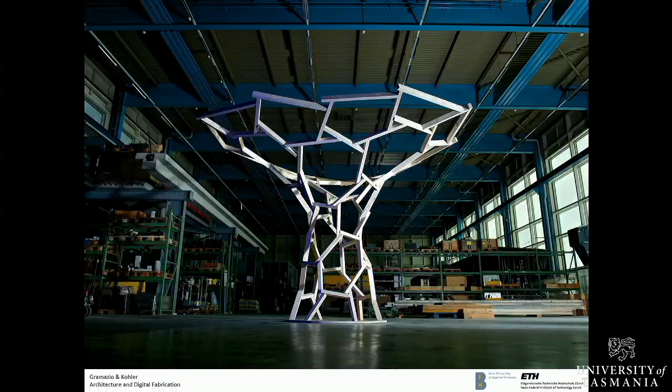That was a structure they built for an exhibition in the Zurich main station. This is the size that the available robot could handle — maybe something like 5 meters high with certain diameters. The geometry was actually built by the robot, and some students or people would just put some screws in by hand. And this is a little bit what we are looking at.

We had seen earlier, when looking at complex timber structures, that we just focus on very few items. The question is, is that actually good enough, or could it be improved? Now we have so many tasks to fulfill — building physics, vibrations, earthquakes. There are so many core areas which we have to start to interconnect.

For the moment, it's rather that we have a specialist in fire, a specialist in building physics, a specialist in developing structures, and we still have the problem of talking to each other. In the future, it will be that we have one big box where everything is dependent on everything else. We have to link between concrete, steel and timber and try to find good solutions, with interactions between all these core areas.

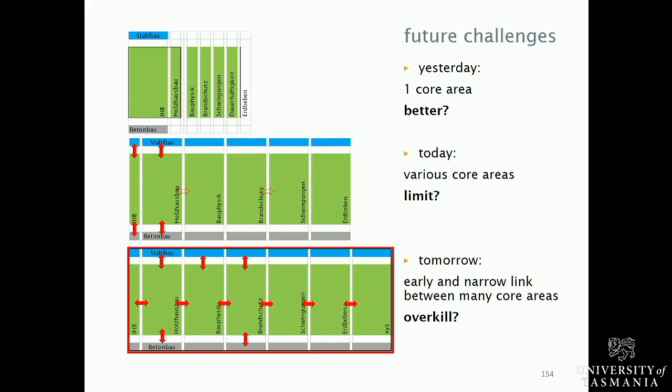And the question is, of course, is this a good way to go? Is this just some show-off solution, or is there really a market or interest in doing that? It could be that you have a kind of overkill of the situation, producing things which you don't really use. I think most of that has been said already.

But this might be a question afterwards for those who would like to stay on. Is it worth to do that? This is what we do today much better than it was before. I think you can dig in your toolbox and find a lot of very interesting old-fashioned or old-style or traditional structures which basically do the job. But here, there are of course some new windows which open.

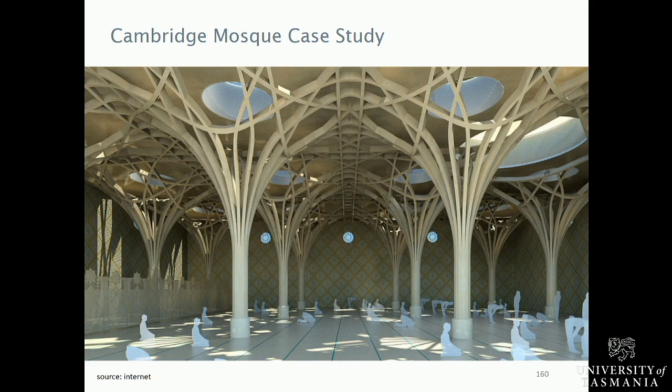And to do that, they had to divide the structure into two. There was a bottom part, which was kind of just a trunk coming up, which is very easy to do. It's a bar that is rotating around, so all the members are the same. And then comes this free shape structure. And then they had to model it and do static calculations. So this poor guy probably had quite some nights' work on it.

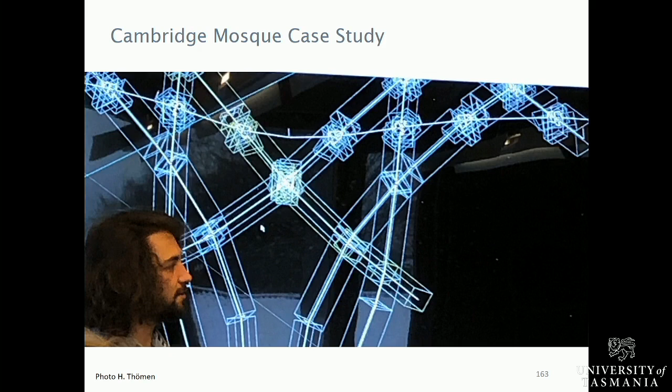So this is an intersection of 2 bars, which you have to put somewhere in the computer, and you have to check that the geometry is right, and you must follow the surface you have developed in terms of architecture. So not an easy task.

So this is just a model of one lap joint connection. We have the neutral axis of the member. One member is cut from top to bottom, and the other from bottom to top.

In doing this, you create eccentricities, and these eccentricities will create additional bending forces in the members. So to show you, this is the initial neutral axis, then you have the cut-in, and you have the displaced neutral axis, and then you have the top member, which is modeled. In order to connect the connecting points, you have to divide these members by 2 and things like that. So this creates that big number of members.

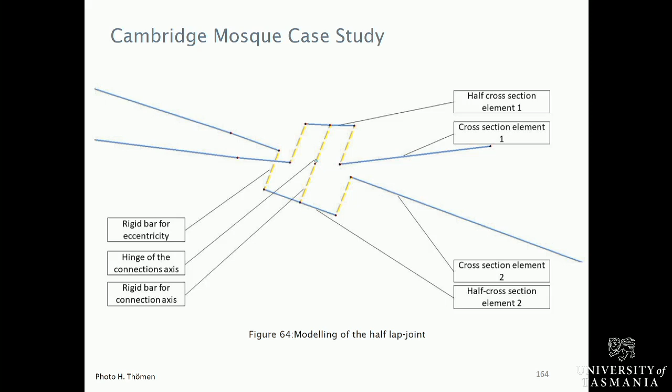Another thing they had to think about is what I was trying to highlight before on this Shigeru Ban building in Metz. You might not be able to do this double curved member by piling up boards, even splitting it up and doing it in 2 directions. So that's why maybe you have to build this blank mother piece and then route it down to the dimension you need in the end for your member, which is the red one.

So you have to make sure that you have enough meat around your bone, and you create a new problem. The new problem is that this member's grain is not following the boards anymore. So because of routing, you will have some cut fibers in the end, and there's a big reduction of strength when you start having fiber to force deviation.

So the students had also to work with routines to find out in what section we have what kind of fiber deviation, and it was limited to 5 degrees, something like that, in order to make sure that the design will work in the end. So lots and lots of work they had to do.

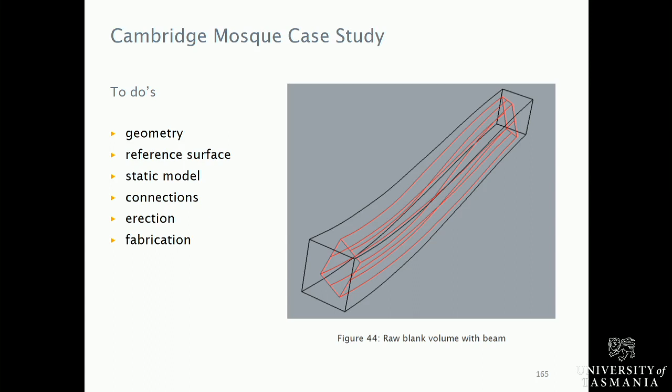This would then be the final node they wanted to produce, like the static model, with two important factors. These are the vectors of how you have to bring in your member. There's only one possible way that you can have this triple contact connection.

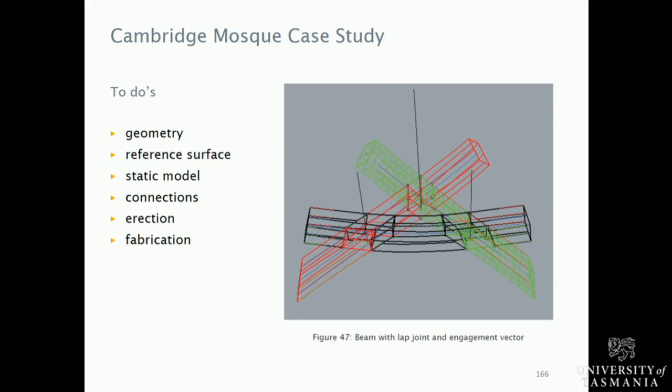So once they had that, they would go on the machine, feed the data to the machine, and route the piece. Here we use some solid timber or some glulam timber, I don't know. Simplified thing, but already, how do you put that piece on?

It's impossible to route it from both sides. So you do one side first and then you do the other side. You have to turn it around and stuff like that. So very complicated. I think this student in the end was quite happy that he has the thing.

So you can see that they're all curved, these members. They're twisted. And there's just one way to put it together.

I once had some visitors. I took it apart and wanted to show how to put it back together. Impossible. Probably a little bit of swelling or shrinkage, and then it wouldn't work.

So this is what we're doing, but basically I'm just showing all these steps. These are the steps the guys have been doing on the Swatch building, for instance, or in other free shape structures, and it needs a lot of handwork.

So the guys who are determining the size or the shape of one member, they have to really control step by step, member by member, connection by connection, every piece. That's why they cannot produce more than something like 80 per week.

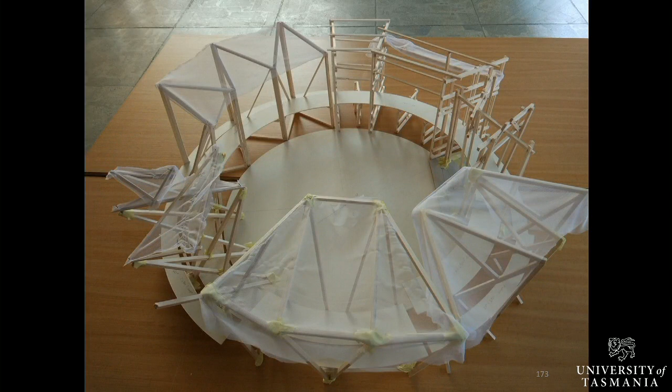Okay, so we do also that in a very short form with architects, because we want to get them thinking in this type of structures. So that was the same approach, simplified, find a solution.

The idea was a round table. The people sit around and you can have like a European Commission discussion in there. So every student had a small slot, or group had a small slot. There were all the different designs, and it was then in the end, the model.

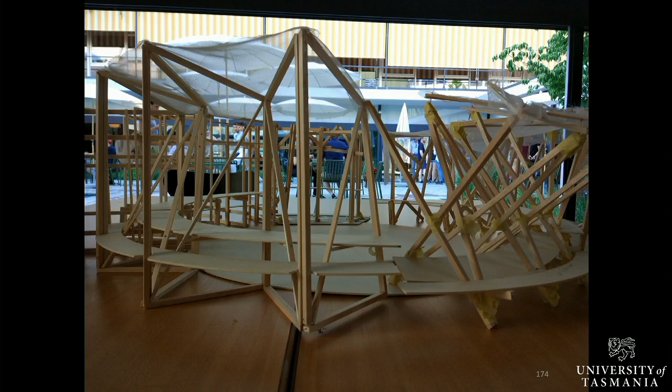Once you have this model, they had to digitalize the models in order to get the connections, because here again, that was one of the models they did.

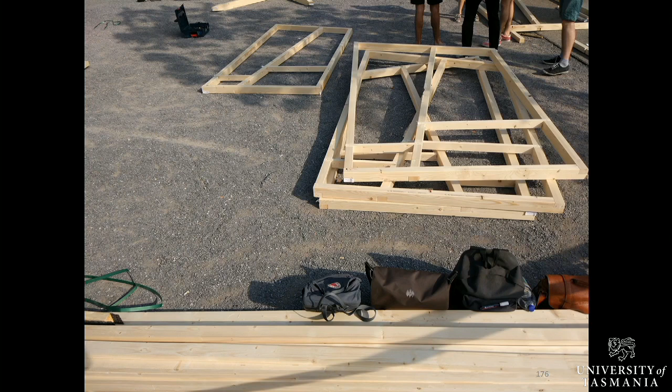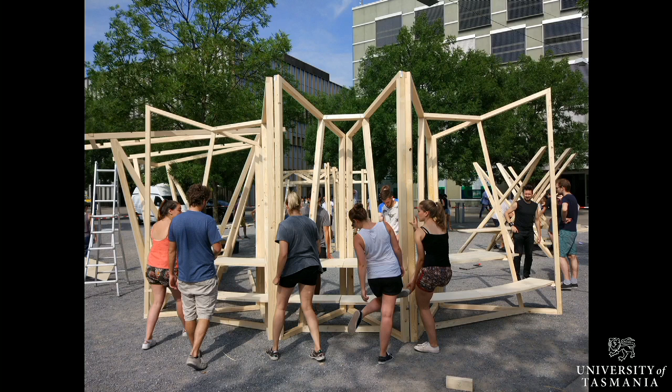This frame here, once you have digitalized these connections and you have built it, you just stick it together like Lego. There's just one way how you can put it together, and you get the frame finished. And so we didn't push it too far. So we had just two sections and lap joints, and then they would put the screw in there just to make it work, and then put it in place. And that was the final solution of that.

Okay, so that was my input. Don't think that you can get to that stage within 2 or 3 weeks or 5 months or whatever. There are many people having worked hours and hours and years, and there are huge research programs on the back. But of course, I think the interesting part for many people would be trying to get at the right level into such systems and try to catch the rolling train.